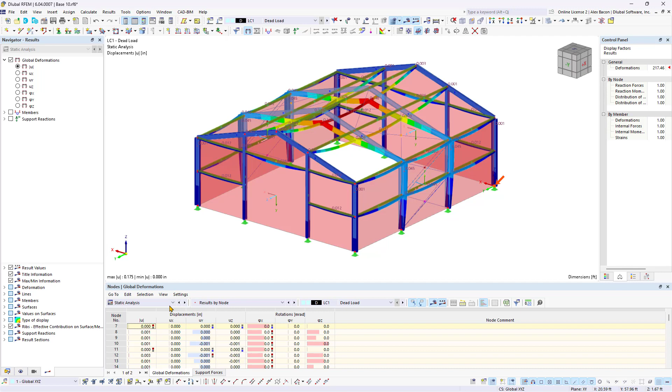Now that we've completed our first calculation, it's time to explore the results in RFEM 6. You'll find internal forces, deformations, and support forces displayed both in tables and graphically on the model. Let's begin with the graphical results. These results are depicted in vibrant colors on the model, making it easy to visualize things like member deformations and support forces.

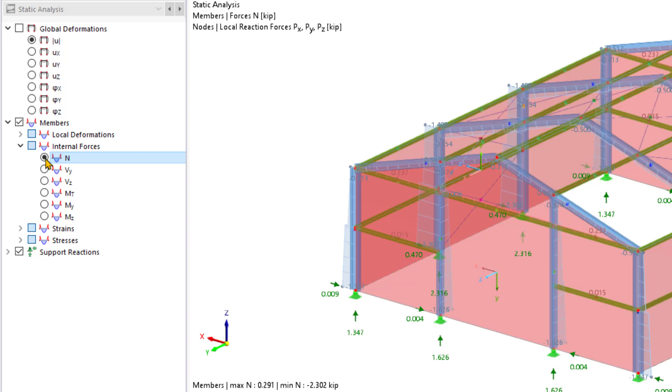On the left in the navigator, you can select the analysis type from the list. The available results are listed in a tree structure. You can click on the desired result to view it in the work window. Beyond deformations, you'll also have access to internal forces, stresses, strains, and support reactions. In the lower part of the navigator, you can customize the display type.

In addition to the graphical output, result tables are available. You can select them from the list as shown here. The first result table provides a summarized overview, including the equilibrium of forces on the system and maximum deformations. Information about the calculation process is also included.

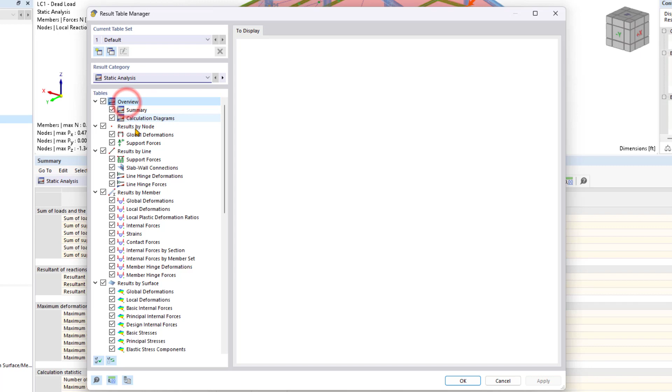You can filter the result tables by specific criteria such as extreme values or design locations. The Overview table result category offers a summary of the calculations. You can switch between the results of load cases and combinations in the table title bar. More result categories can be found by expanding the list or using the arrows.

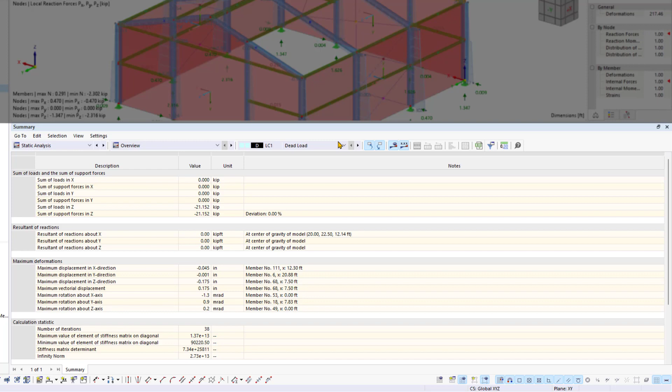The numerical nodal results can be found in the results by node. This is another table category. If nodal supports are available, they can also be found in the respective tab. The results by member table category provides an overview of the numerical member results. You can switch between result types at any time using the tabs in the lower part of the tables.

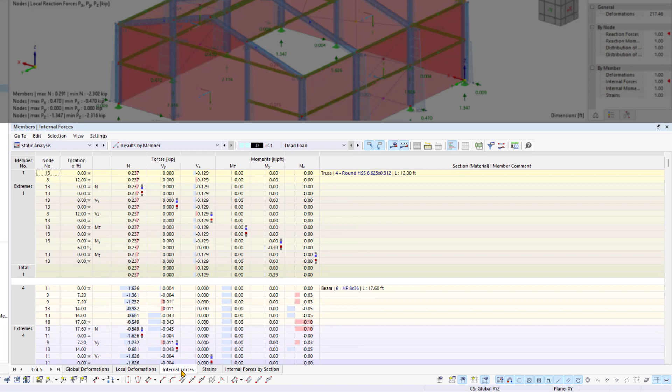The result tables use a color to indicate whether internal forces are positive or negative in their relation to the extreme values. The graphics also use color to represent positive or negative internal forces, and you can customize these colors if needed.

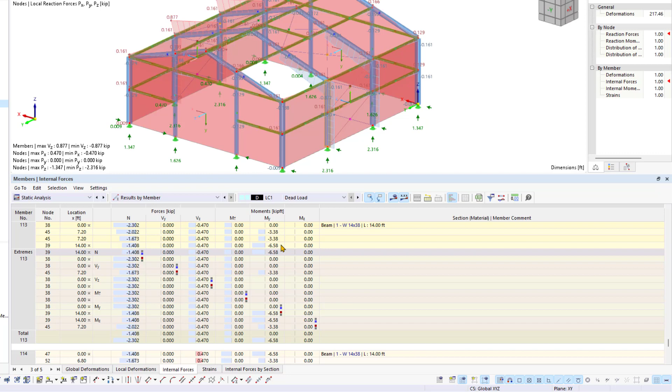One particularly useful feature is the real-time interaction between the tables and the work window. Click on an element in the graphic, and the table will jump to the results for that specific element. And vice versa. An arrow will indicate the location on the element, ensuring an efficient workflow. If necessary, you can deactivate this feature.

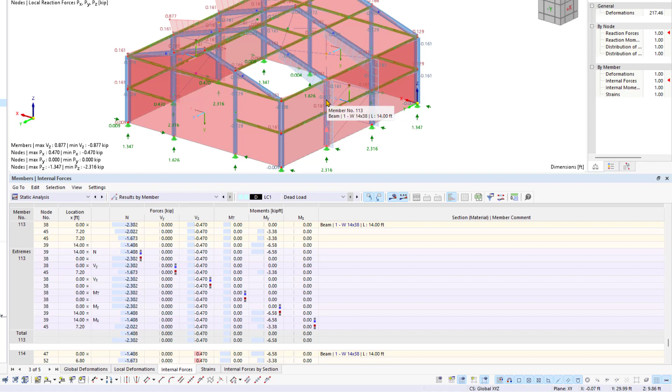In addition to tables, RFEM provides the option to view result diagrams of selected members. To use this function, select the desired member and click the Result Diagrams from Selected Members button. This function features a dialog box that aligns with the RFEM user interface.

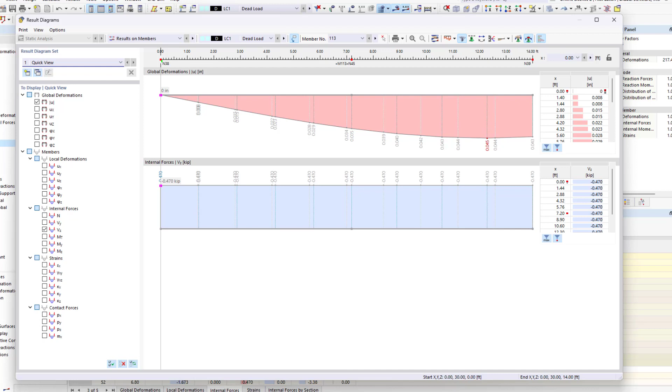Now you have a comprehensive understanding of RFEM results. In our next video, we'll learn how to export and include them in a printout report. But before that, we'll delve into the design process.